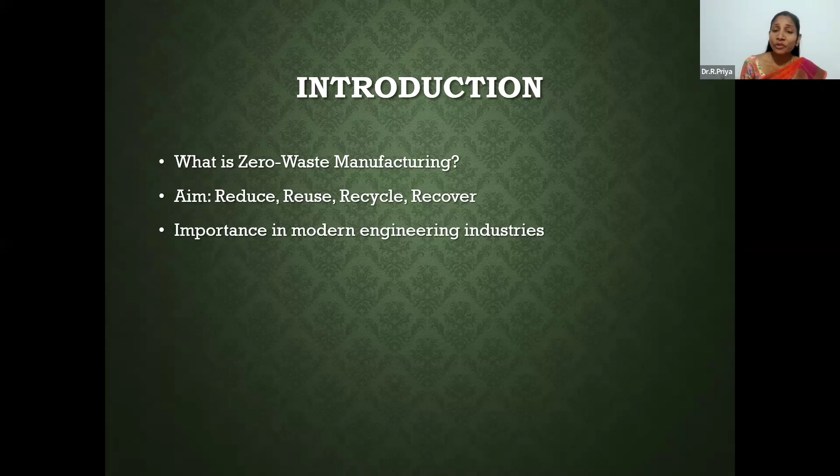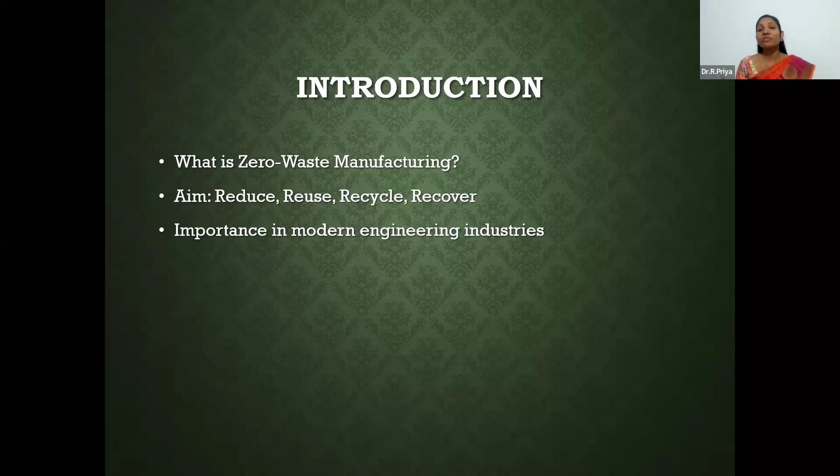So why is this concept most important for modern engineering industries? Because today companies are under pressure from environmental regulations, rising material costs, and sustainability goals. So waste is not just an environmental issue, it is a financial loss also. Every piece of scrap, defective items, or unused energy represents money thrown away. Engineers play a crucial role here by designing systems, machines, and processes that minimize waste from the very beginning. Another key point is that zero waste practice improves efficiency, product quality, and brand reputation. So modern industries expect engineers to be environmentally responsible innovators who can develop cleaner technologies and smarter production methods. As future engineers, your role goes beyond technical skills. You will also help build factories and products that are sustainable, efficient, and competitive. Zero waste manufacturing is one of the most powerful ways to achieve this.

Need for zero waste manufacturing. Now let's understand why zero waste manufacturing has become a necessity, not just an option. First, industries today are generating huge amounts of waste, from metal scrap and chemicals to packaging and rejected parts. Managing this waste is becoming increasingly difficult and expensive. As future engineers, you will be responsible for designing processes that reduce this burden.

Second, all this waste contributes directly to environmental pollution. Landfills are overflowing, water bodies are contaminated by industrial discharge, and air pollution from manufacturing processes is at an all-time high. Zero waste systems help industries reduce their ecological footprint. Third, we are facing resource scarcity. Natural resources like metal, minerals, and fossil fuels are finite. When industries waste materials, they are essentially wasting resources that future generations may struggle to access. Zero waste methods ensure better utilization and conservation of these resources.

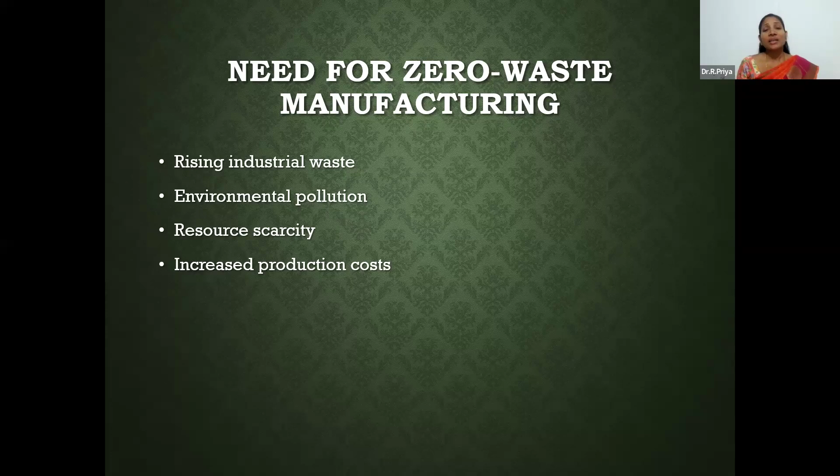Finally, production costs are also rising. Raw materials are getting costlier and waste disposal charges are increasing. By recycling waste, industries can save money, improve efficiency, and stay competitive. These are the key benefits involved. So when we talk about zero waste manufacturing, we are not just talking about sustainability, we are talking about smarter, more efficient engineering. That's why your role as an engineer is crucial in driving this transformation.

Let's look at the key principles that make zero waste manufacturing possible. These principles act like the backbone of any sustainable production system. First, resource efficiency: using material, energy, water, and manpower in the most optimal way. As engineers, your goal is to design processes where every input is used fully, with minimal leftover, directly reducing waste and lowering cost. Second, closed loop systems: these ensure materials never leave the production cycle as waste. Instead, whatever is produced as output, even scrap or by-products, is fed back into the system or reused elsewhere. Think of it as recycling built into the manufacturing process itself.

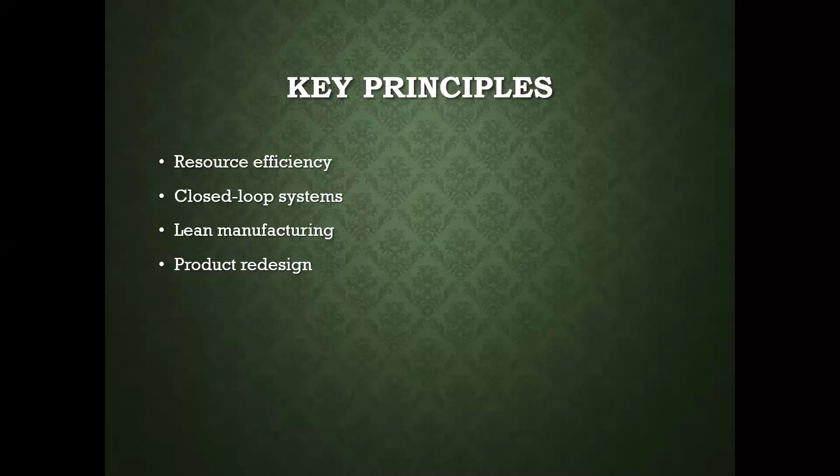Third, lean manufacturing. Lean manufacturing focuses on removing all forms of waste, whether material waste, time waste, overproduction, waiting time, or unnecessary movements. Lean principles help companies improve productivity while reducing resource consumption. This is one of the most important frameworks engineers use in industry. Then finally, product redesign.

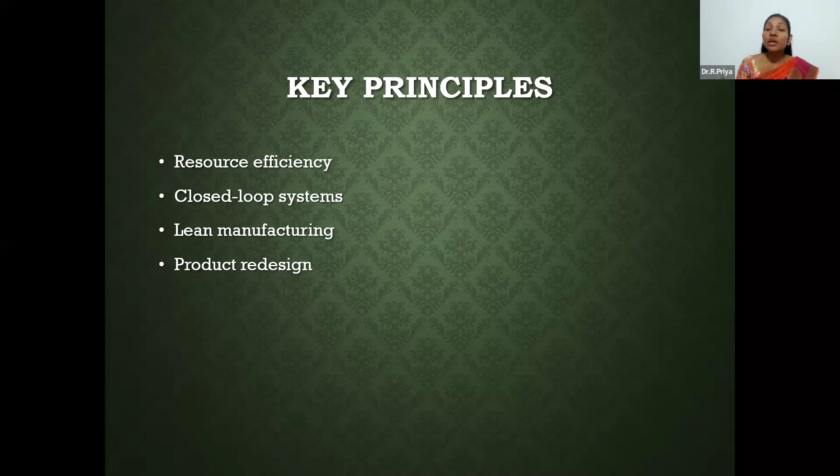Sometimes this happens because the product itself isn't designed for efficient manufacturing. By redesigning the product to be modular, simpler, or easier to assemble or disassemble, companies can dramatically reduce waste. This is where engineering creativity plays a major role. Together these principles help industries move towards a cleaner, more cost effective and future-ready manufacturing model.

Now let's discuss zero waste methods in engineering, some practical methods engineers use to achieve zero waste manufacturing. These are the techniques you will actually work with in the industry.

The first one is material substitution. Sometimes waste comes from using materials that are difficult to recycle or prone to defects. By switching to eco-friendly, recyclable, or more durable materials, we can reduce waste right from the design stage. For example, replacing certain plastics with biodegradable polymers, or using alloys that have better recovery rates.

Then process optimization. A lot of waste is generated simply because processes are not efficient. Through optimization, such as improving machine accuracy, reducing cycle timing, and minimizing scrap during cutting, engineers can significantly cut down waste. This is one of the core responsibilities of industrial and mechanical engineers in a manufacturing plant.

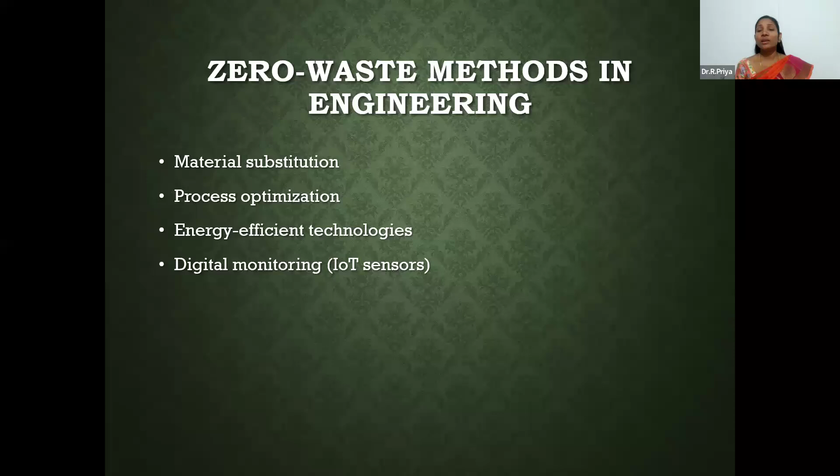So all these four methods work together to create smarter and more efficient industries.

Next, let's explore an exciting concept in sustainable engineering called industrial symbiosis. Industrial symbiosis means that waste from one industry becomes a useful input for others. Instead of sending byproducts to landfill, industries exchange them in ecosystems. It's similar to how natural ecosystems work—nothing is wasted, everything is reused by another organism.

Here are some common examples. One is heat recovery: industries that generate excess heat, such as power plants or steel mills, can transfer that heat to nearby industries for drying, heating, or steam generation. This reduces energy consumption for both sides.

Then fly ash usage. Thermal power plants produce fly ash as a major waste product, but instead of dumping it, cement and brick manufacturing industries use fly ash as a raw material. This not only reduces waste but also lowers the demand for natural resources like sand and clay.

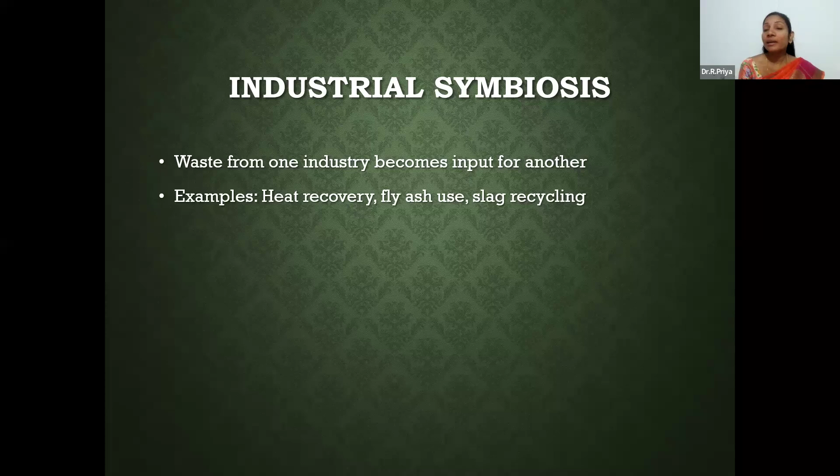Then lean manufacturing and waste minimization. Lean manufacturing is built on the idea of eliminating anything that does not add value to the final product. In Japanese, these non-value adding activities are called muda, which simply means waste. The seven types of waste we can simply call the Muda formula. Lean identifies these seven major forms of waste in production systems.

That is: overproduction, making more than needed, which automatically leads to waste. Another is waiting, the idle time due to delay or lack of material. Then transportation, unnecessary movement of materials, which can lead to damage and automatically leads to wastage.

Then over-processing, doing more work than required. Then inventory, excess raw material or finished goods. Then motion, unnecessary movement of people. Then defects, items that fail quality checks and lead to rework. As an engineer, your job is to design systems that eliminate these wastes as much as possible.

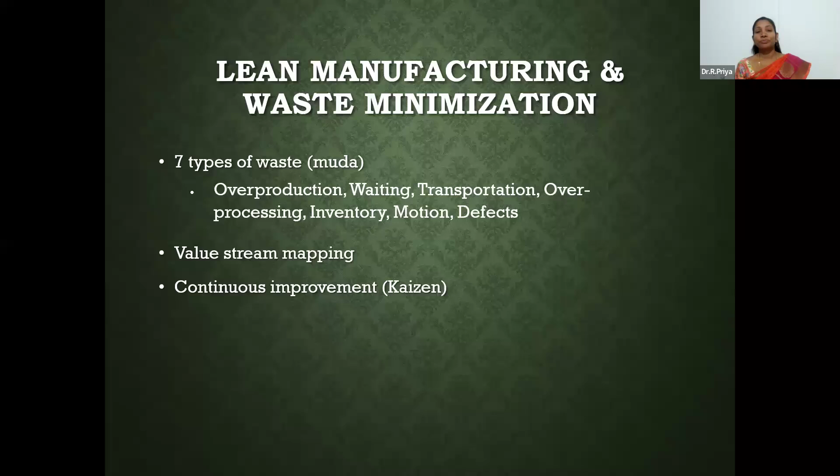Then waste reduction technologies. These are modern technologies that help industries significantly reduce wastage, transforming how engineers design, produce, and package products.

First is additive manufacturing, that is 3D printing. Traditional manufacturing is subtractive, we cut away material which creates scrap. But additive manufacturing does the opposite, it builds the object layer by layer, using only the amount of material required, which drastically reduces material waste. It's also great for prototyping, customizing parts, and complex shapes that cannot be made using conventional methods.

Then CNC precision machining. CNC machines offer extremely high accuracy and repeatability. Because the machining is precise, there is less scrap, fewer defects, and reduced rework. Engineers can optimize tool path, speed, and feed rate to further minimize waste and energy usage.

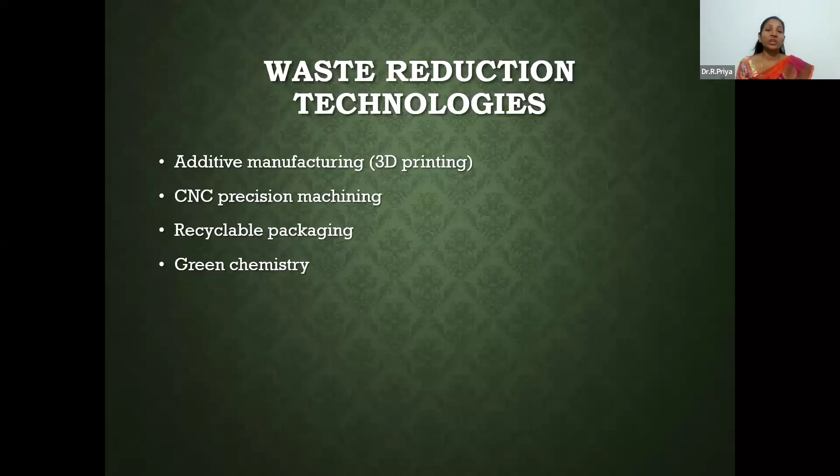Then the role of automation and IoT, Internet of Things, in supporting zero waste manufacturing. Modern industries are moving towards intelligent, connected, self-optimizing systems. This shift plays a huge role in waste reduction.

First is smart factories. Smart factories use integrated automation, robotics, and real-time data to run operations with minimal human error. Because machines and systems communicate with each other, the entire production line becomes more efficient. This reduces defects, downtime, overproduction, and energy waste, all of which contribute directly to the zero waste goal.

Then sensor-based tracking. IoT sensors monitor temperature, vibrations, machine performance, material flow, and energy usage. This real-time data helps detect abnormalities earlier. For example, excessive vibrations may lead to machine faults or material loss. By identifying issues immediately, industries can prevent waste before it happens.

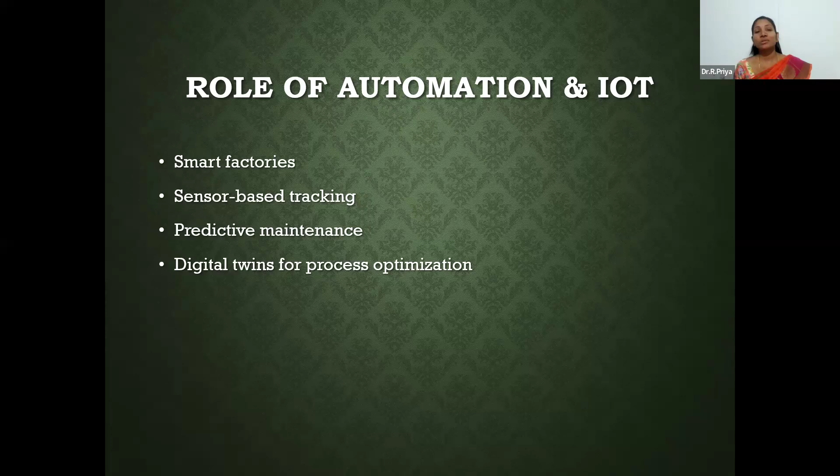Then circular economy in manufacturing: how the circular economy connects with zero waste manufacturing. The circular economy is all about keeping materials in use for as long as possible, extracting maximum value from them, and minimizing waste at every stage.

First is recycling loops. In a circular system, materials are not thrown away, they circulate. This is a manufacturing design process where plastics, chemicals, and other materials are continuously recovered, recycled, and reused. For example, aluminium scrap from machinery can be melted and reused repeatedly without losing quality. These recycling loops are essential for conserving resources and reducing environmental impact.

Then product life cycle extension. Instead of designing products with a short lifespan, companies now focus on making them last longer. This can be achieved through durable materials, easy repairability, upgradeable components, and even modular design. When products stay in use longer, industries produce less waste and consume fewer raw materials. As engineers, your design directly influences how long a product can remain in service.

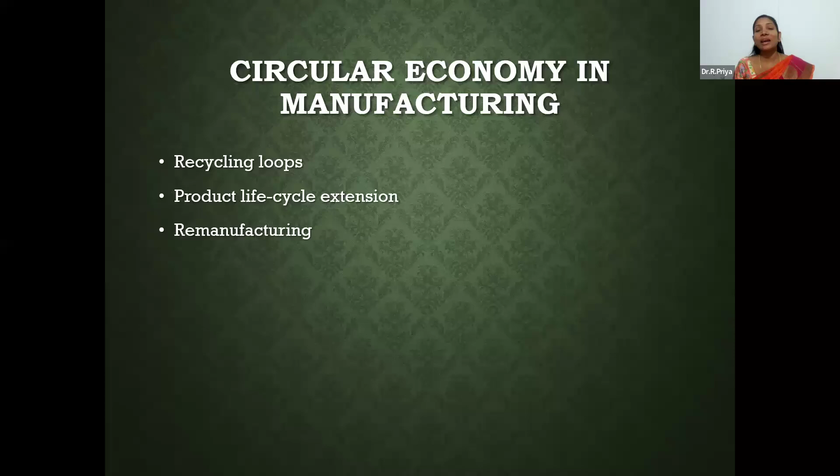Engineers play a central role in designing for reuse, recycling, and long term sustainability. Previously, the formula was take, make, dispose. The circular economy is entirely helpful for changing this formula—instead, how we can reuse, how we can recycle, and achieve long term sustainability. That formula is most important in modern industry, introduced to replace the traditional take, make, dispose economy.

Then zero waste design, which focuses on designing products in a way that minimizes waste right from the beginning.

The first one is eco design. Eco design is a sustainable approach where environmental impact is considered during the product's entire life cycle, from raw material to manufacturing, usage, and disposal. Its goal is to reduce pollution, resource consumption, energy usage, and end of life wastage. Examples include designing electronics that use fewer toxic materials, or creating shapes that minimize cutting waste in manufacturing.

Second, modular products—made up of easy to replace or easy to upgrade components. This approach helps reduce waste because the product lasts longer, only faulty parts need replacement, and upgrading becomes simple without discarding the whole product. Industries like electronics, furniture, and automobiles increasingly use modular design for sustainability and cost savings.

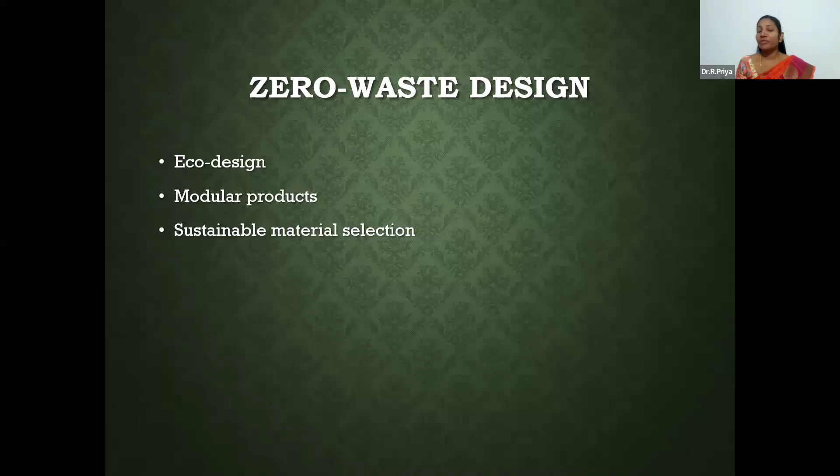Here I am just giving one live example: Toyota. Let's look at a real world example of zero waste principles in action. One of the most famous pioneers of lean manufacturing, Toyota's entire production system is built on minimizing waste and maximizing value.

One of their core achievements is the integration of lean tools such as Just In Time and Kaizen, which drastically reduce unnecessary steps and improve process efficiency. Toyota developed the Toyota Production System, which later became the foundation for global lean manufacturing. Their process focuses on eliminating the 7 types of waste, Muda—overproduction, waiting, transportation, over-processing, motion, inventory, and defects—making workflow smooth, uninterrupted, and highly efficient. This system has inspired almost every modern manufacturing company.

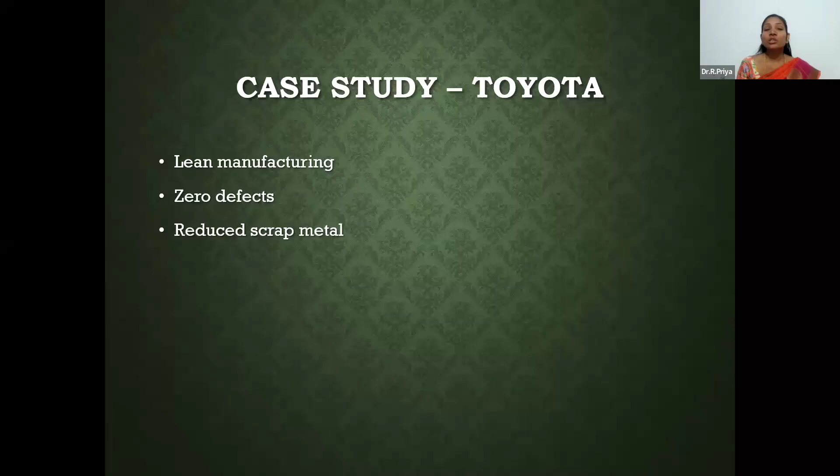Next, Tata Steel and Mahindra. Yes, the industry leaders - how Indian industry leaders like Tata Steel and Mahindra are successfully applying the zero waste and circular economy principles. Both companies are known for integrating sustainability into their engineering and manufacturing processes.

Slag recycling: Tata Steel is one of the global leaders for slag utilization. Instead of sending steel slag to landfills, they process it and convert it into valuable material used for cement manufacturing, road and railway ballast, and construction aggregates. This not only reduces waste but also replaces natural resources like stone and sand. Mahindra has followed similar circular practices in its foundry and metal operations, ensuring minimal waste output.

Then energy recovery. Both Tata Steel and Mahindra use advanced technologies to recover energy from their operations. For example, Tata Steel captures waste heat from blast furnaces and converts it into electricity through waste heat recovery boilers. Mahindra's automotive plants use heat recovery systems and solar energy integration to cut energy consumption. This reduces carbon emissions and lowers operating costs.

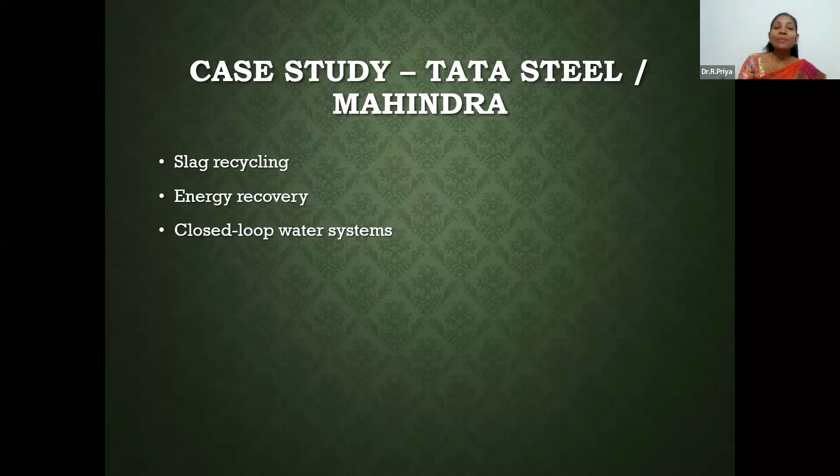Together these practices demonstrate how major Indian companies are moving towards zero waste circularity and more efficient engineering. They serve as strong models for future engineers like you, who will shape the next generation of sustainable industries. But there are some challenges behind implementing zero waste manufacturing.

Before concluding, it is important to understand that achieving zero waste manufacturing is not always easy. Industries face several challenges while trying to shift from a traditional system to a sustainable one.

First is high initial cost. Many zero waste technologies like automation, IoT sensors, waste treatment plants, or energy efficient machines require significant upfront investment. Although these investments save money in the long run, the initial cost can be a barrier, especially for small and medium enterprises.

Second, the technology requirements. Zero waste manufacturing relies heavily on advanced technologies such as digital monitoring, green chemistry, and recycling systems. Industries must upgrade their existing equipment and processes to adopt these technologies effectively.

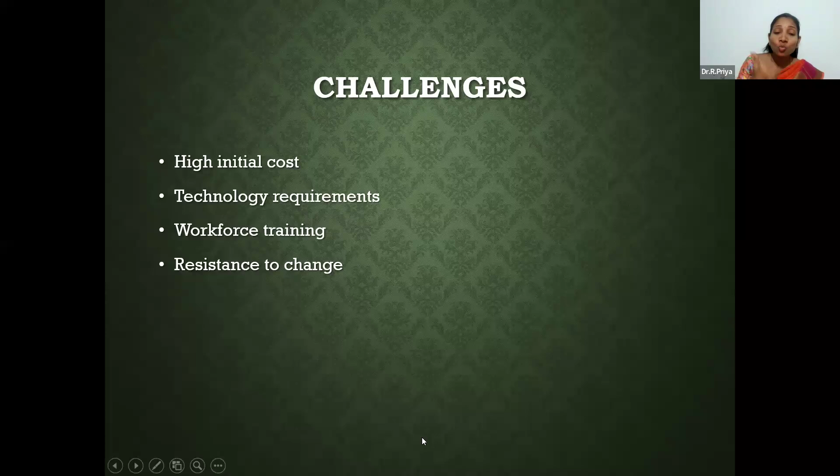These challenges show that zero waste manufacturing is not just a technical shift - it is also an organizational and cultural transformation. But with the right approach, industries can overcome these barriers and move towards more sustainable and efficient systems.

Whatever may be, finally, let's look at the key benefits of adopting zero waste manufacturing. These outcomes show why industries around the world are moving towards sustainable engineering practices.

First, cost savings. By reducing scrap, energy waste, defects, and unnecessary processes, companies save huge amounts of money. I agree the initial investment is high, but it's a one-time investment that leads to continuous cost savings. Lower material usage, reduced disposal costs, and improved process efficiency all contribute to long-term financial gain. Even though the initial investment may be high, the return on investment is very strong.

Then reduced emissions. Zero waste practices help industries cut down on greenhouse gases, air pollutants, wastewater discharge, and solid waste generation. Cleaner processes mean a smaller carbon footprint and healthier environment around the industry area. This is especially important for sectors like steel, chemicals, and energy.

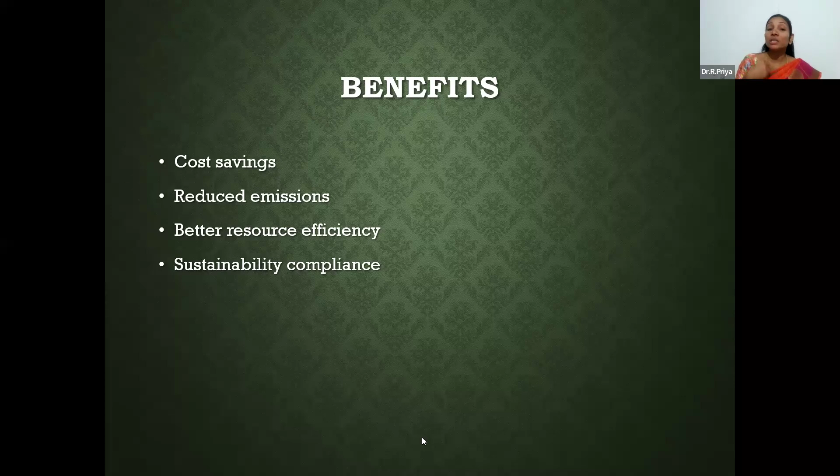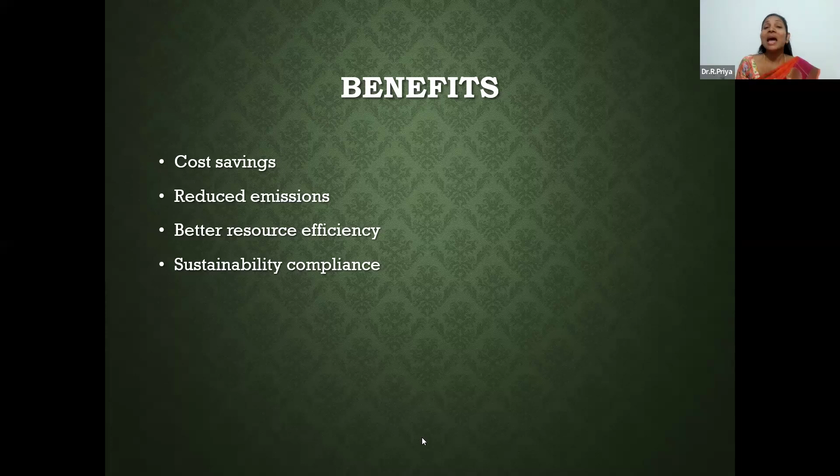Sustainability compliance: Government and international bodies now require industries to follow strict environmental and sustainability standards. Zero waste approaches help companies meet ISO standards, environment regulations, and CSR commitments. This improves corporate reputation and avoids legal penalties. Overall, these benefits show that zero waste manufacturing is not just good for the environment.

It is also good for business and essential for the future of engineering. Finally, we can discuss the future trends in zero waste manufacturing, that is the scope of zero waste manufacturing. As we look ahead, several exciting trends are shaping its future, combining advanced technology, automation, and sustainability to create smarter and greener industries.

First is AI driven optimization. Artificial intelligence is becoming a major force in manufacturing. AI algorithms can analyze huge amounts of data from machines and sensors to optimize material usage, energy consumption, production scheduling, and quality control. AI helps detect defects before they occur, reducing scrap and improving process efficiency—all essential for zero waste manufacturing.

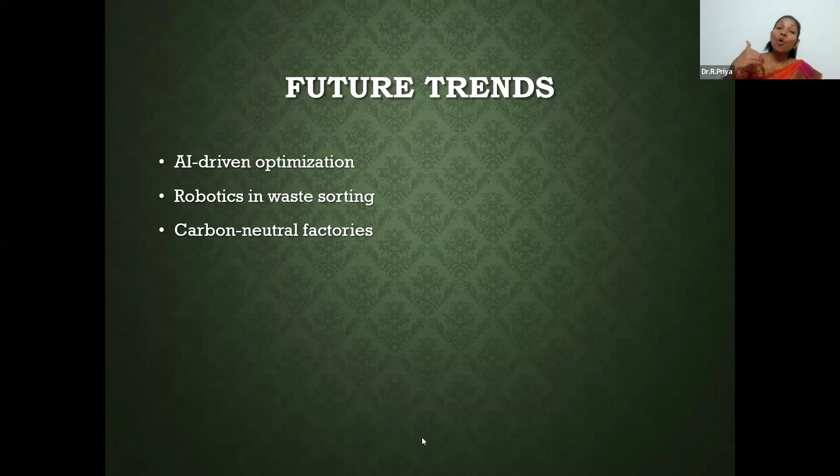Then, robotics in waste sorting. Industrial robots are now being used to automate waste sorting, especially in recycling plants and large manufacturing units. With computer vision, robots can identify, pick, and separate materials faster and with more accuracy than humans. This improves recycling efficiency and ensures that more materials re-enter the production cycle instead of becoming waste.

Then, carbon neutral factories. Industries are moving towards carbon neutral or even carbon negative factories. This includes renewable energy integration like solar, wind, biomass, carbon capture technologies, and net zero emissions strategies. These factories aim to eliminate carbon emissions while producing minimal waste and creating a cleaner future in industrial operations. So the future of manufacturing will be highly automated, data driven, and sustainable.

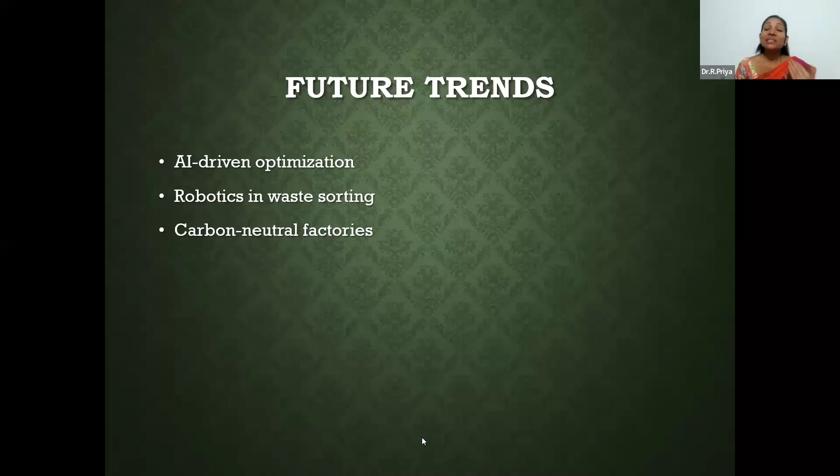Finally, we come to conclusions. Remember that zero waste manufacturing is not just an environmental concept, it is a necessity of engineering. It helps industries reduce waste, improve efficiency, and—more importantly—stay competitive in the world. Zero waste approaches are both sustainable and cost effective. Companies save money by reducing scrap, lowering energy usage, and minimizing defects, all while protecting the environment and improving operational performance.

Zero waste manufacturing requires future-ready engineering skills. Technologies like AI, IoT, automation, digital twins, and advanced materials are transforming how modern factories operate. As upcoming engineers, your ability to design efficient processes, apply sustainable principles, and innovate with new technologies will be crucial for building the factories of the future. I hope this section inspired you to think differently about how engineering can shape a cleaner and smarter world.

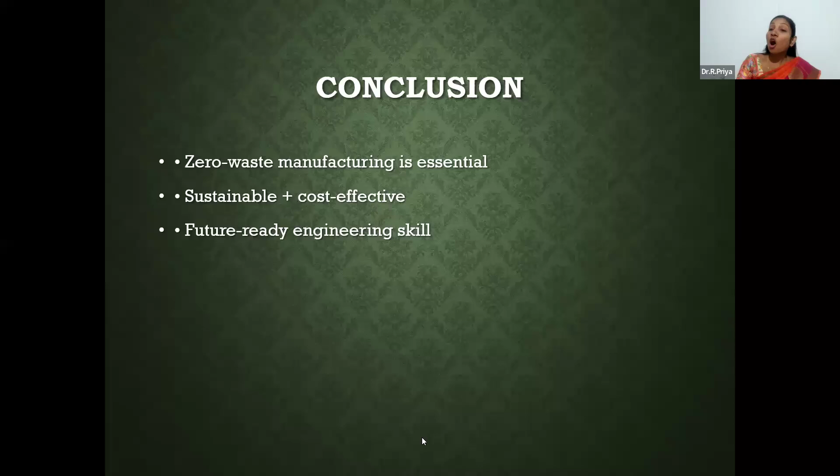Operations or production managers ensure the manufacturing process minimizes waste and implement lean, efficient practices. Environmental health and safety (EHS) managers lead sustainability and waste management initiatives. Sustainability and ESG managers design zero waste strategy and long-term sustainability goals. Quality managers ensure defect-free production, reducing rework and scrap. Supply chain or procurement managers select eco-friendly suppliers and materials. Maintenance teams optimize machines to reduce resource consumption and losses. Top management—CEOs, secretaries—are also responsible because they provide approval, budget, policies, and organizational support.

So zero waste manufacturing is surely a shared responsibility. We can't say it is one department's responsibility, but normally the EHS (environmental health and safety) manager and production manager usually take the lead in any company regarding zero waste manufacturing. I hope that is very clear to all. If you have any doubt, please ask me, otherwise let's leave the session. Thank you.

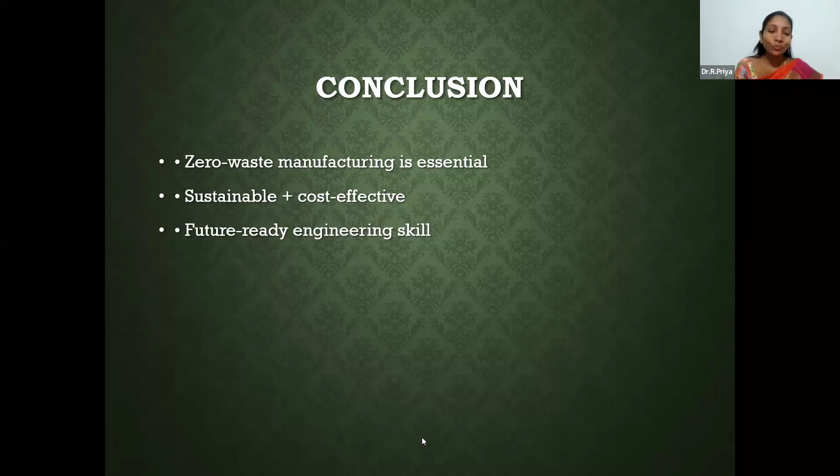Thank you, ma'am. Yes. Thank you, ma'am. Thank you, ma'am.